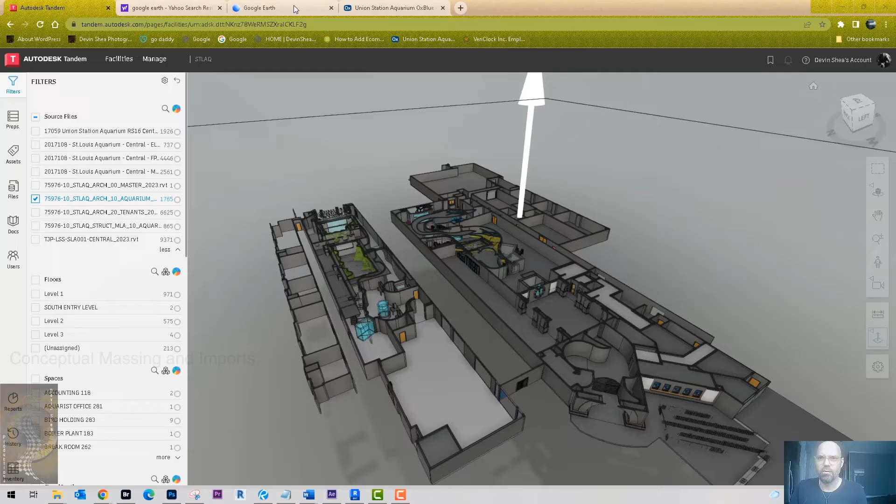This is one of my favorite projects that I was a part of. It's called the St. Louis Aquarium, located in St. Louis, Missouri. I was flown from my home in California to St. Louis to work with a firm called PGAV, a huge firm that does museums, theme parks, aquariums, and stuff like this.

With this gigantic train shed, what we're looking at here is the Union Station Hotel and Union Station in St. Louis. It's a very old train station from the early 20th century that was converted into an indoor shopping mall in the 80s, then bought by a developer around 2012, and we built a $150 million aquarium to go inside of here.

It has a nice Ferris wheel, and you can see the St. Louis Aquarium is now on the sign. I can't remember the exact square footage in here, but it is just massive.

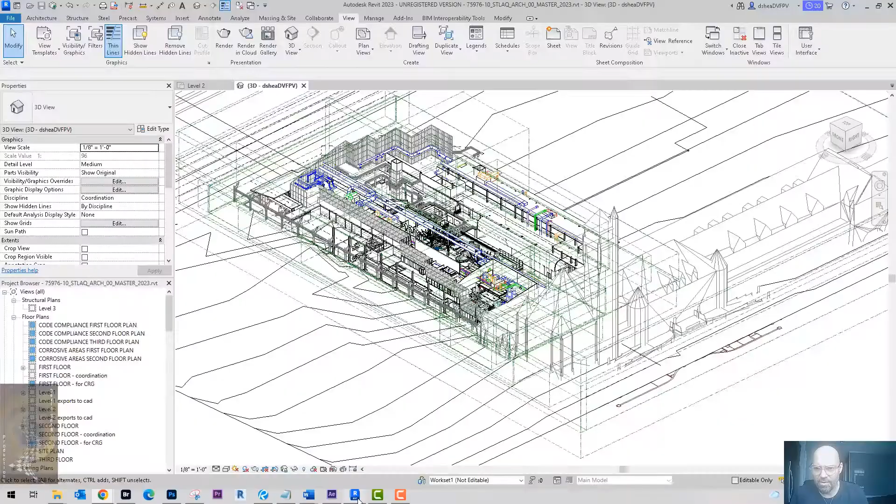What I have is the Revit model, and I'm going to be using a program called Tandem to give a proper walkthrough of the model.

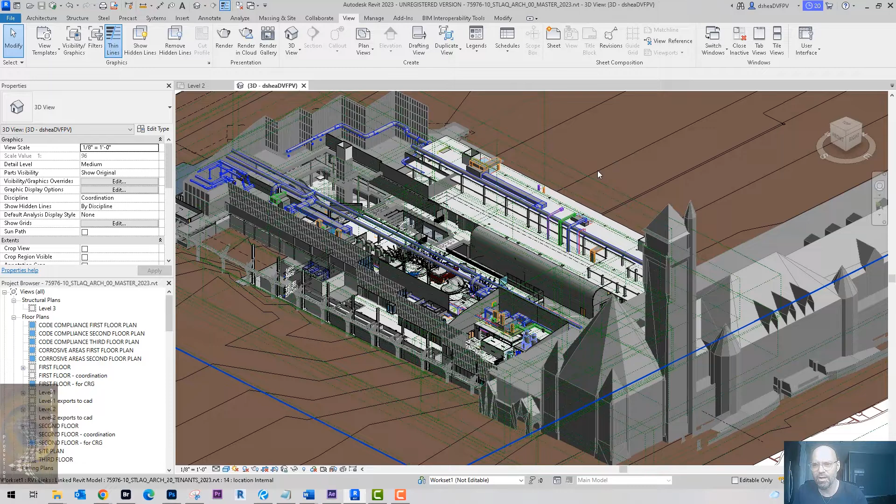My involvement in this project was I was brought in during the DD stage because we needed to create an Unreal video game that we were able to walk around in, in full high quality render mode with VR goggles and whatnot, to show the developer what his $150 million project was going to look like.

This has about 8 different Revit models linked together and properly coordinated. We have an as-built model and all of the standard consultants, and then a huge LSS for fish and wildlife in here.

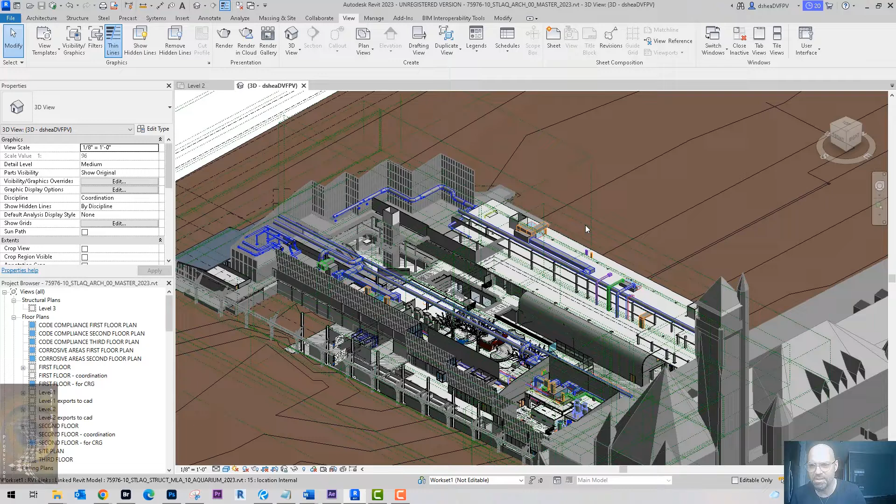My involvement in the project was I was the BIM coordinator, so I essentially did all of the architectural modeling and then coordinated about 30 disciplines of different designers and aquatic specialists and aquarium habitat folks. We used Revit as the primary medium, but we also had AutoCAD and 6 other different types of digital media going in and out of this project.

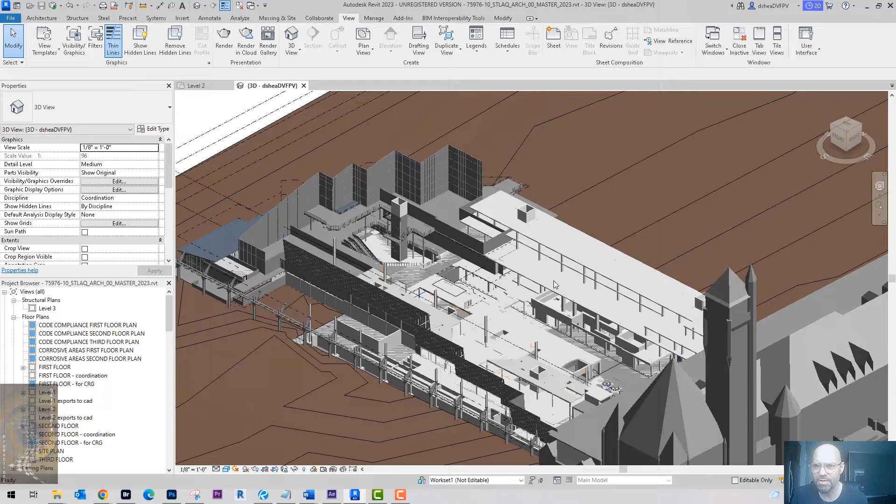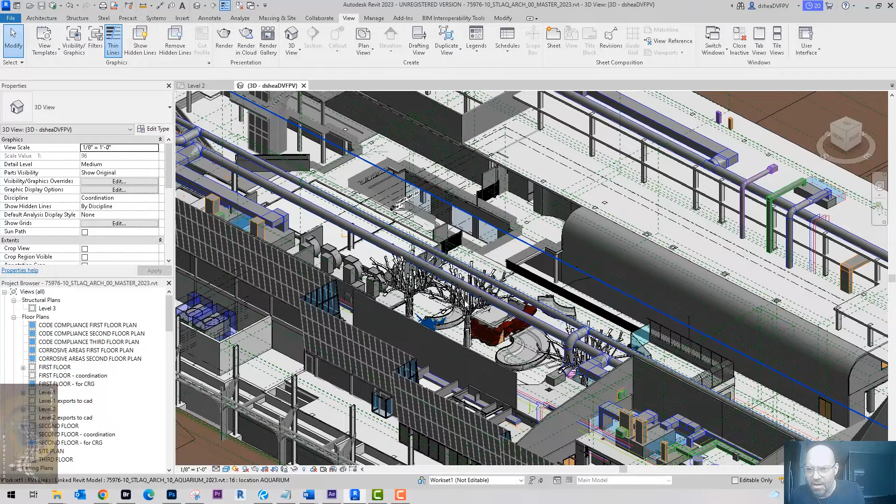I basically was working for the architects PGAV, and I built all of the architectural related items, and then different designers built different elements for the model. For instance, we had graphic designers creating signage, exhibit designers creating different things for the exhibits, and your normal engineers and different types of people working on that kind of stuff.

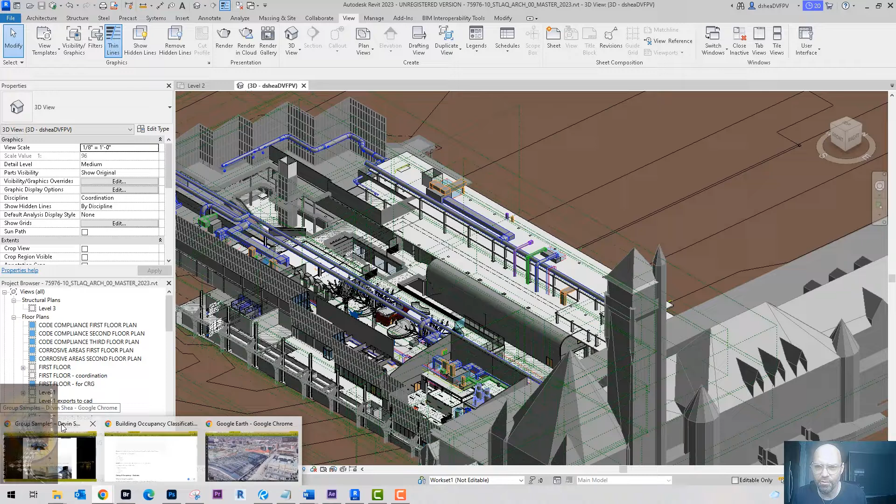Once we would create the architectural model inside of Revit, then we would kick it over to the visualization team, who would build further detail in 3ds Max and implement it into the video game, but all of the work flowed through this Revit model here.

What I have is I'm going to use this program called Autodesk Tandem to go over the different models and give you a little walkthrough of the project.

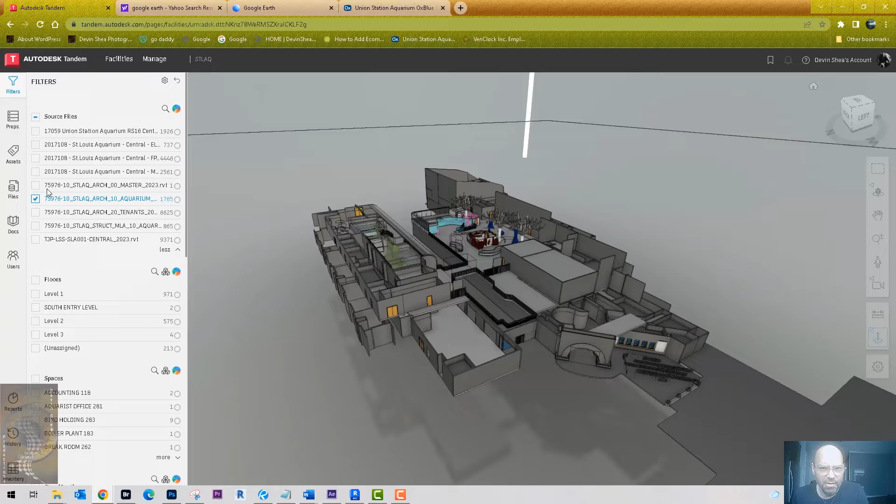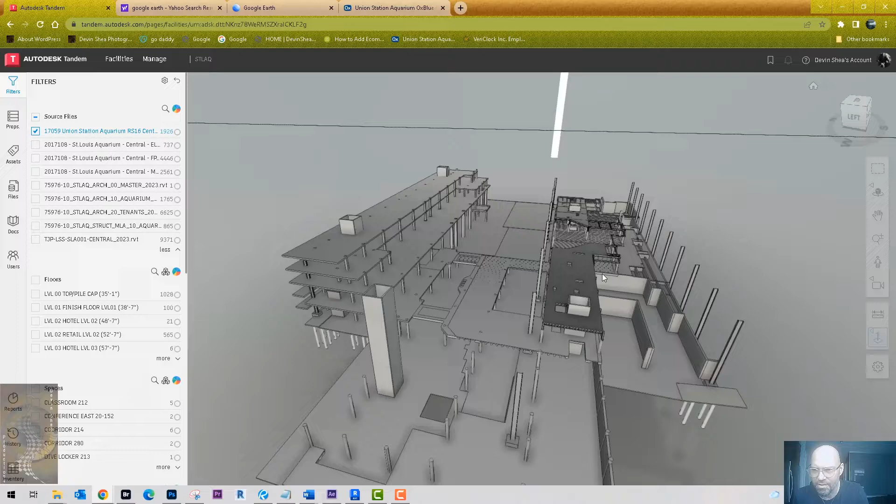So we first have some as-built conditions. Like I previously mentioned, this thing was fitted out in the 80s to create sort of an indoor shopping area. So you had a big open atrium here that you could walk around in, and then you had different stores and restaurants on these different levels. And then there's actually a hotel that has rooms up in this area here.

So, turn on some of this stuff.

Okay, so this is the actual architectural model here, which I was in charge of. I modeled most of this stuff here. We're going to be going over that in a second.

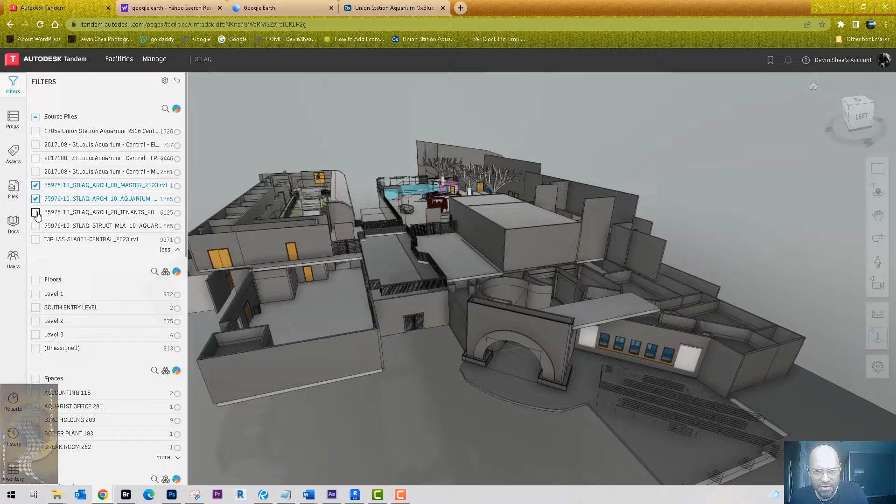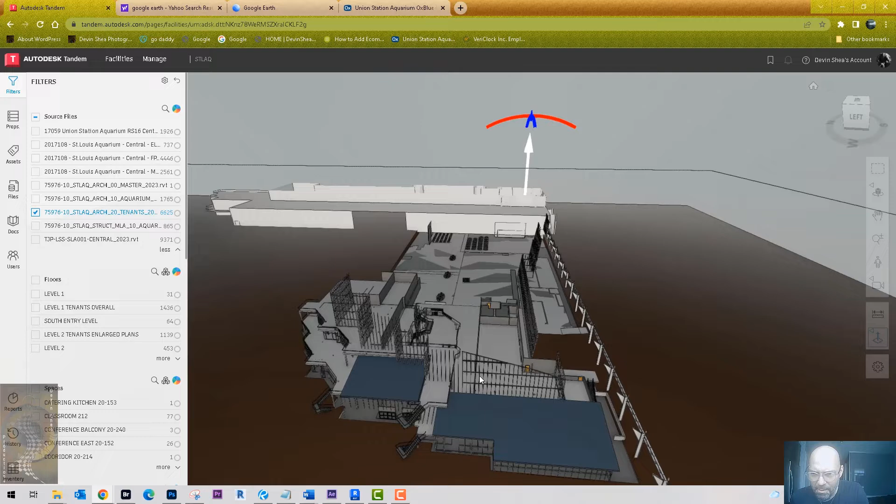Then we also have all of the normal consultants. Turn this off a second. So this is the new structural model here, the new piles and stuff you can see down there.

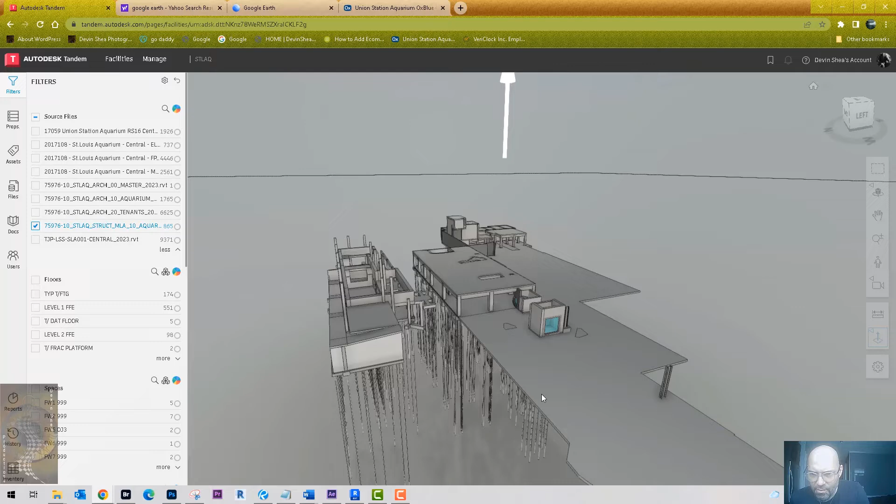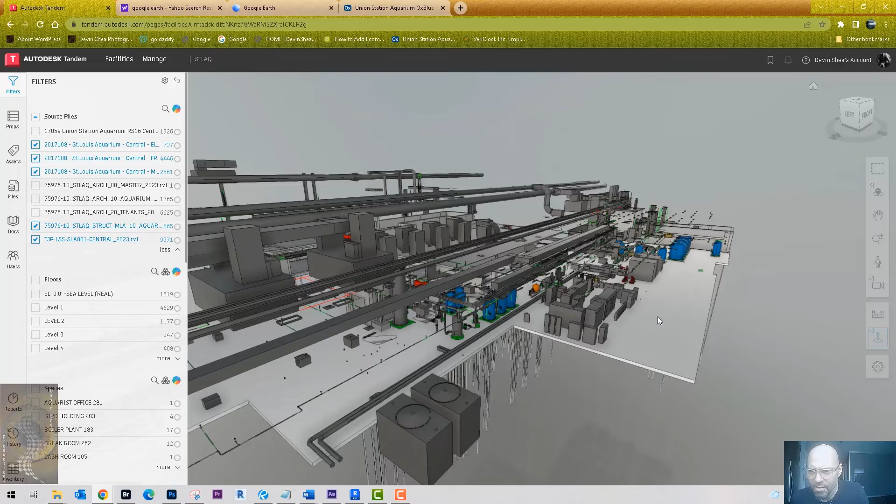And then we have your standard mechanical, fire protection, electrical, and then we also have LSS for fish, as I call it, so life support systems for aquatic habitats—make it sound a little more intelligent. So these are all of the MEP items here in the model.

So I just coordinated all of the consultants' BIM workflows, and I was basically in charge of the model on the Revit side—I'm sorry, in charge of the Revit model on the architectural side.

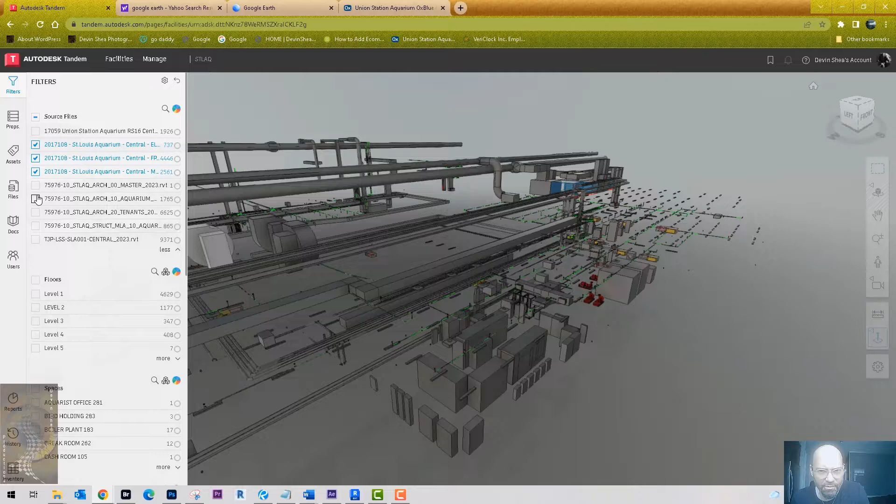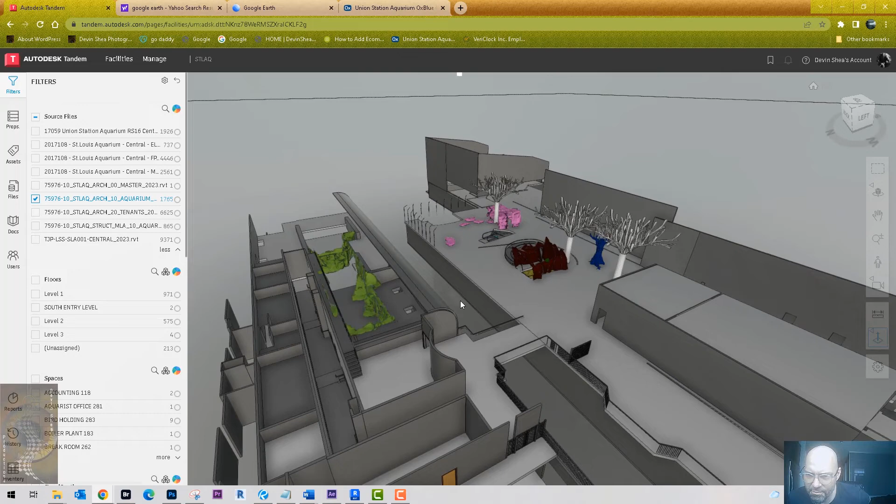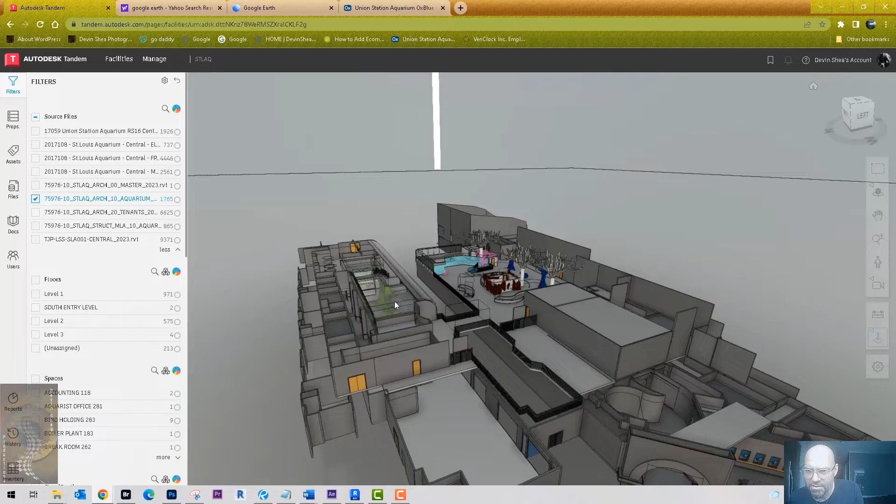Alright, so then what I'm going to do here is turn this on. So all of this is the aquarium itself. Up here on the top floor area we have the touch tanks, the otter exhibits, and this was basically broken down into different parts of aquatic habitats. So you had saltwater fish, freshwater fish, things like your standard bass and trout and whatnot, then there was a shark tank—this is actually the shark tank in here—and different smaller jewel tanks and little exhibits all along here.

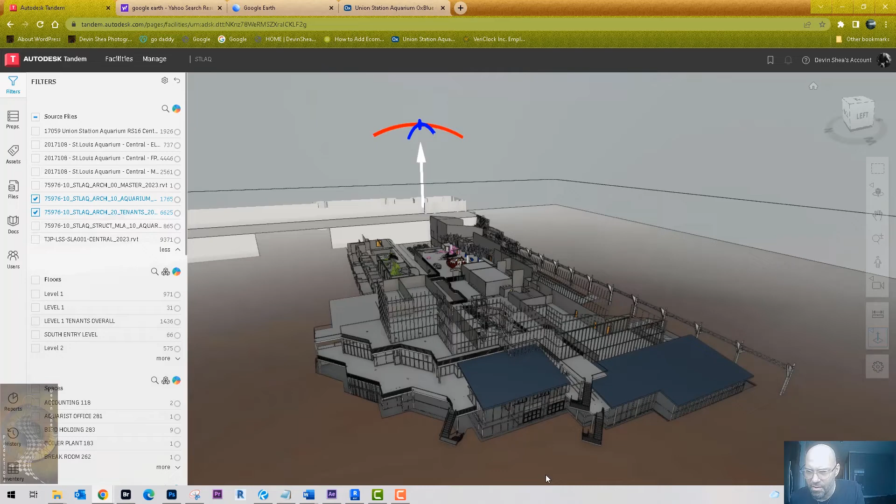So essentially you would come into the front doors, which were located here. You would enter here, go through a little entry area, and then once you're inside of the actual aquarium, you would enter the aquarium here and make your way through the exhibits. So what I'm going to do is go into first person mode here.

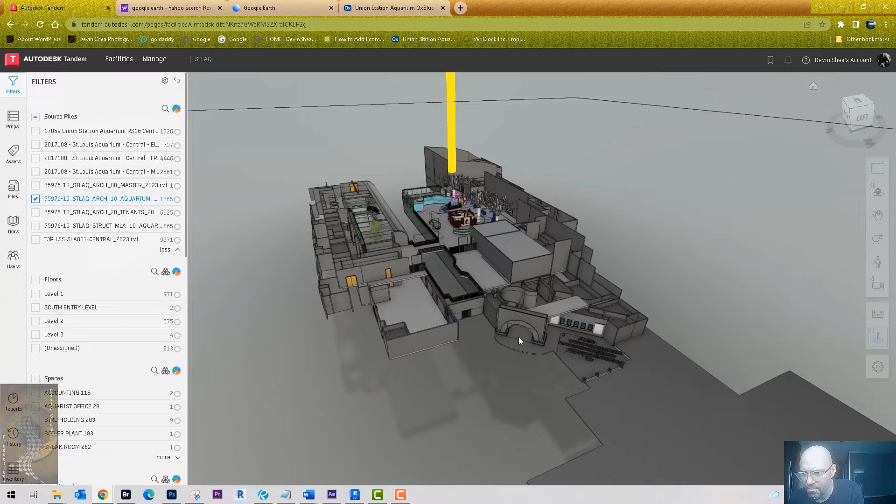Excuse me while I fumble around for a second. Alright, see if I can get this to work. Okay, so now we're going to take a little tour. Hopefully this floor will not give me too much trouble here. Caution, I am not the best at walking through. My nephew would love to do this. And of course this is working fine before I started recording here.

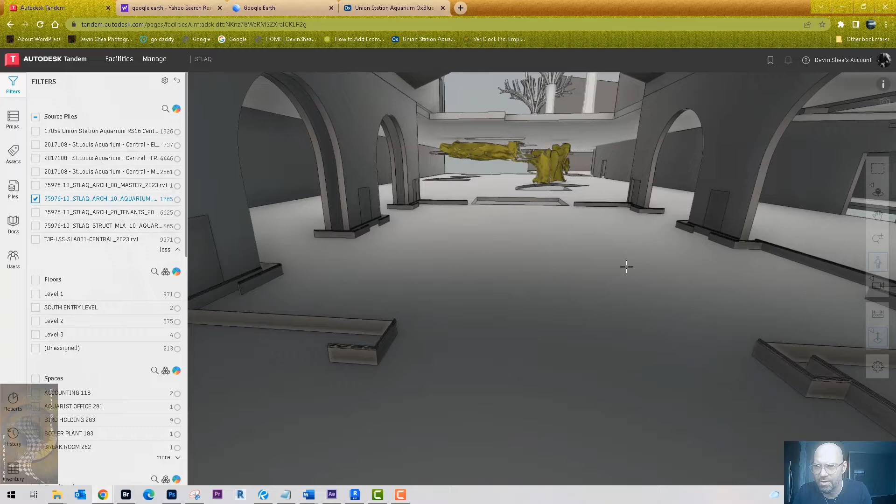So we just entered the aquarium, so you're going to come in here to the first area, which is the main train hall. The aquarium sort of had this train theme because it was an old train shed. Let's see if I can rotate here—can't really orbit. So from here you would walk into this little area, which was a little train car, and then you could walk down here.

Unfortunately the model is glitching out a bit, but as you come around this corner here, you are entering the Muddy Missouri, I believe it was called. So this is all rock work with the fish tank here.

So inside of what you're looking at here, this was rock work that was modeled using ZBrush. There was an exhibit artist that would create a 3D mesh of what would become prefabricated pieces of essentially plastic rock or plaster that made it look like rock, and then they would take this model and export it to me, and then I would stick it into the Revit model.

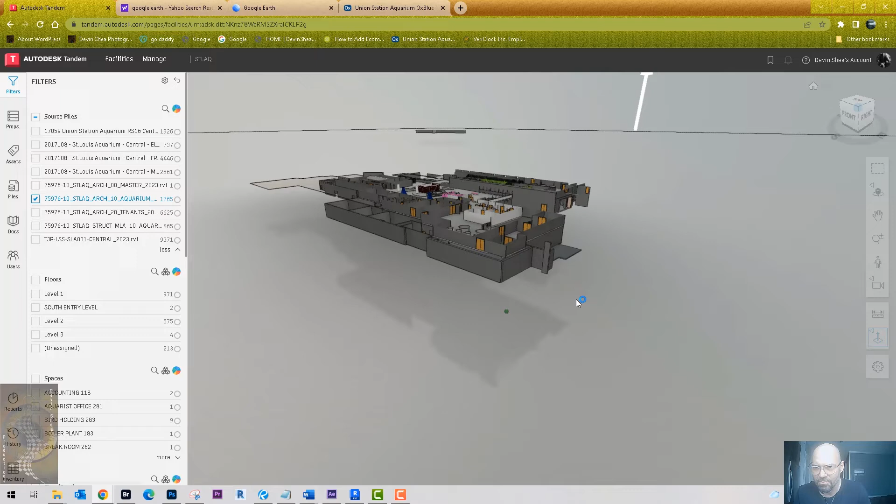So I'm going to get out of first person mode here. And then I'm going to use my cut plane here so we can have a better look. I want to zoom in on the shark tank. I always have to turn on my tenant model. Let's see where I'm at.

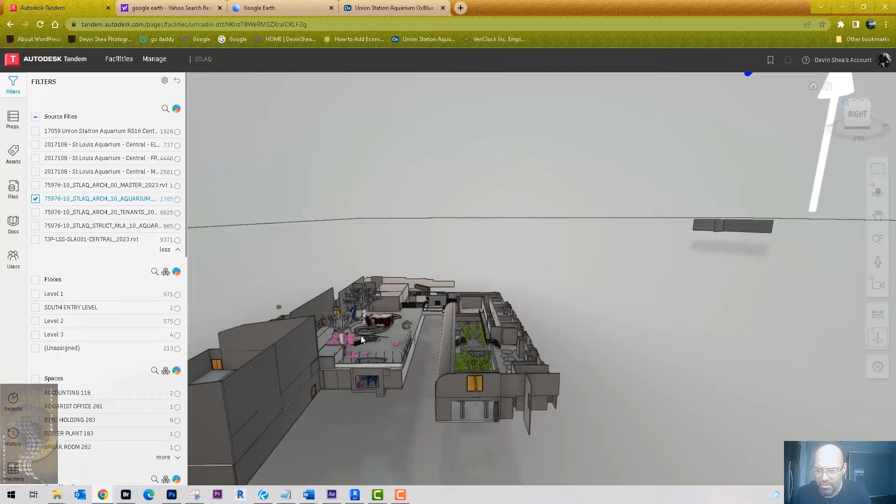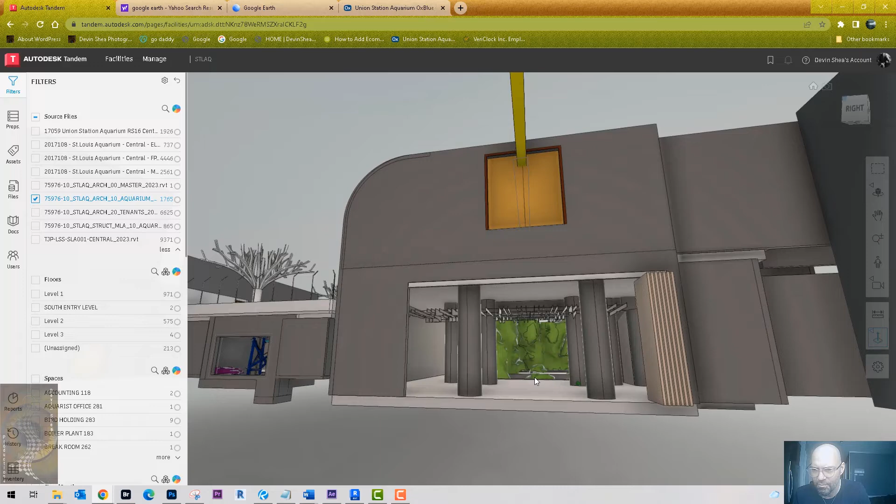Okay, so the shark tank is located here. Is the shark tank here, and you would walk in essentially from the hotel lobby. So this area right here would actually be the hotel lobby, and then you would walk in. There's actually a picture of the shark tank on my website. There's my lovely ceiling thing that I made. So this would be the shark tank area here.

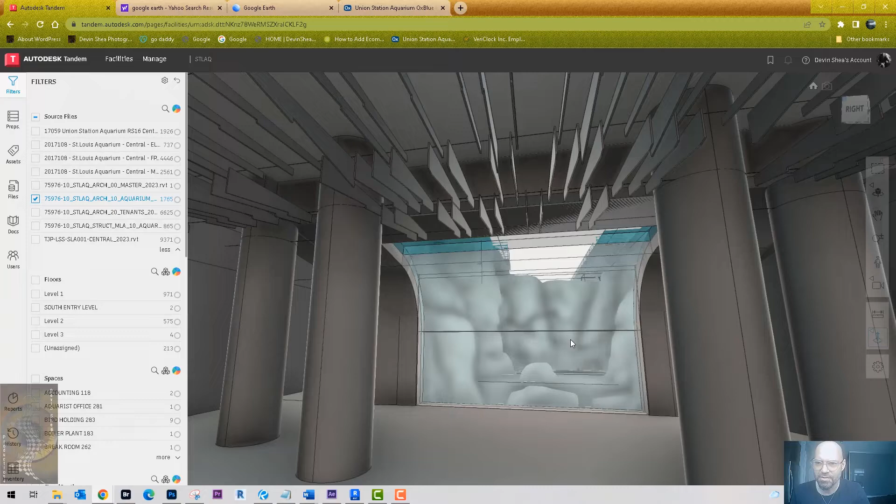It's the biggest tank and the coolest in the whole project. So let's zoom up here a little bit. This is a little crane that they use to bring stuff into the tank and take the sharks out.

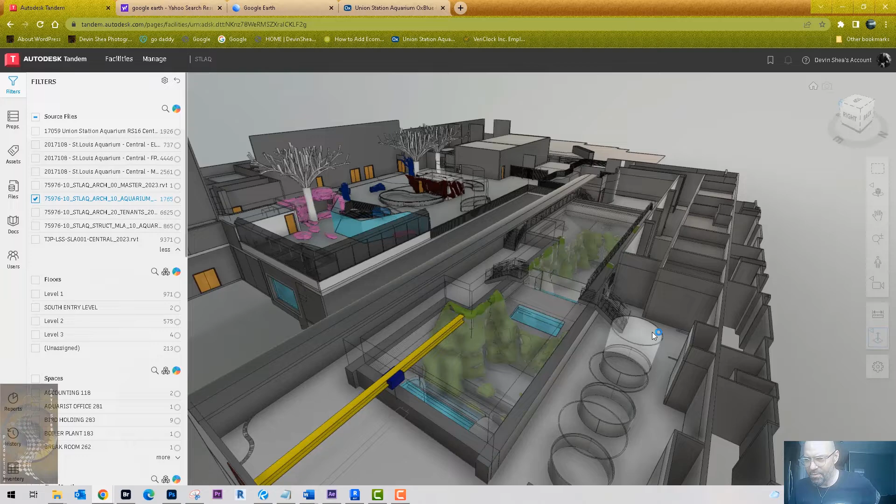These are little service areas. I'm sorry, these aren't service areas, you can actually walk above the tank. It's only been like 6 years since I worked on this, so I'm trying to remember, but these are little jewel tanks here that have different types of fish in them.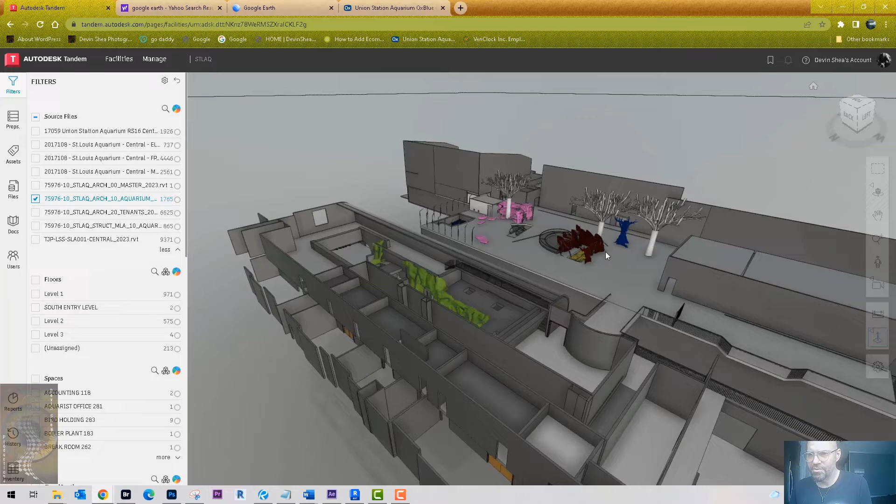And then you can walk over here above the shark tank, find your way over to here, and across this little platform over here to the touch tanks and the otter exhibits.

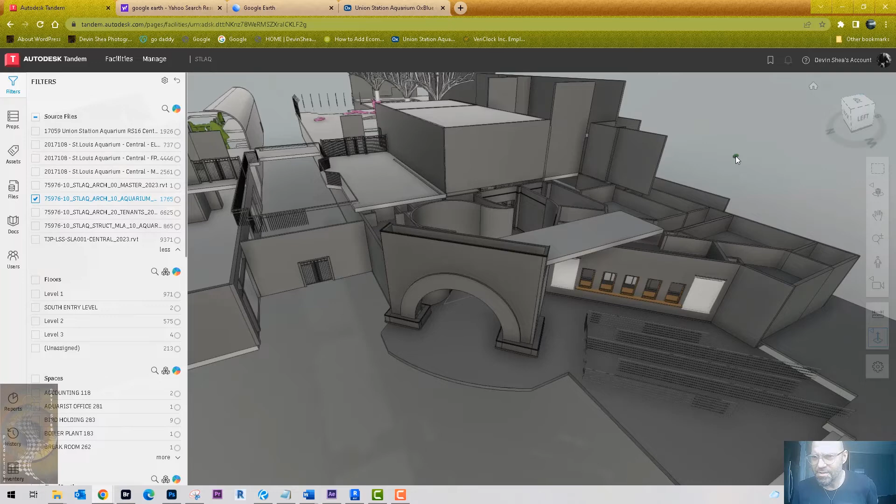So the challenges of this project were that there were many different trades and consultants using all different formats of digital delivery. So we had people using AutoCAD, people using IFC models, all kinds of stuff. The difficult part for the architects and myself was that they didn't utilize a 3D scanner.

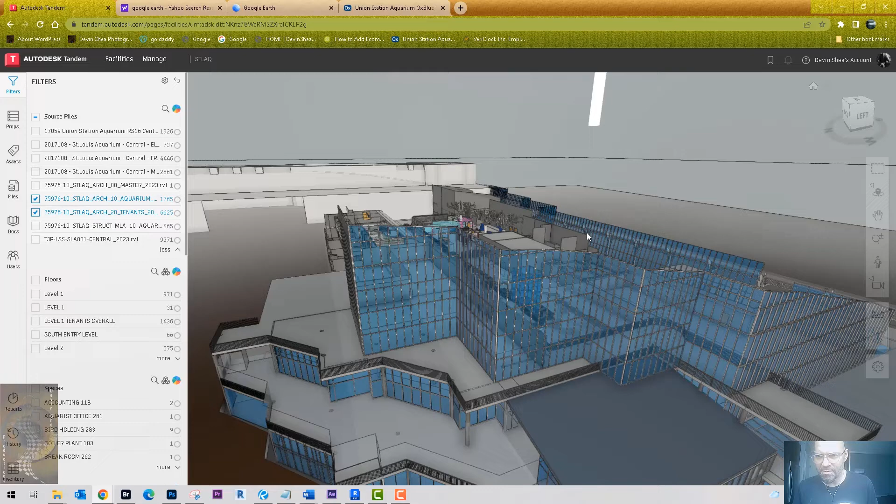So things like this curtain wall, where I literally had to climb on top of this roof right here and use a tape measure to attempt to measure these walls. A 3D scanner would have been great, because this train shed roof was like 200 feet tall, so it was very, very tricky. Maybe not 200 feet, but pretty darn tall. So you can just imagine what the scope of this thing was inside of here.

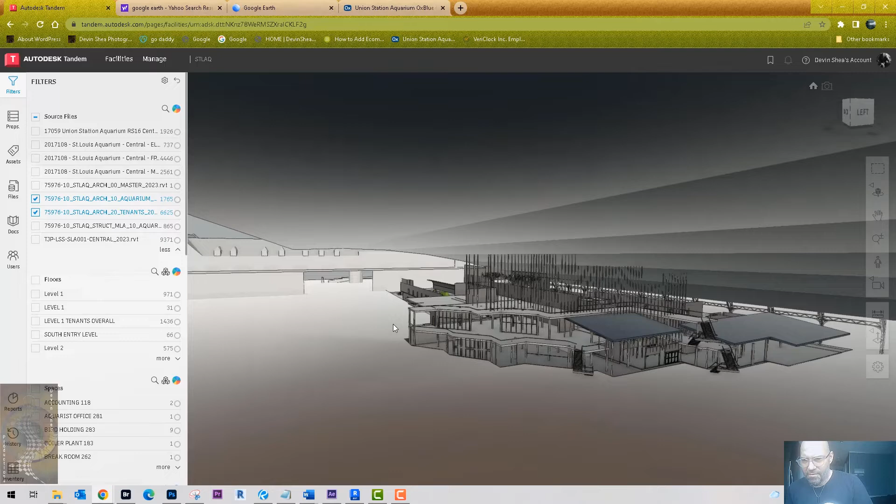Okay, well that is all that I have to talk about on the St. Louis Aquarium. This is one of my favorite projects because I am an expert in visualization. I'm trained on all the video game stuff. So basically what I did was consult with my team and teach them all of the ins and outs of the workflow to deliver this project.

After the project was done, they've won several awards on this project, and I recommended my clients for a technology conference in St. Louis. So I actually submitted to a colleague of mine that they should reach out to PGAV and have them come and speak at the convention. So my project architect and the project manager on this project, including the visualization gentleman Steve, were all keynote speakers at a technology conference, since I kind of helped them do all this.

So this was a pretty big deal in St. Louis, because in the Midwest, BIM is not really utilized a lot. So thanks for watching my presentation. If you have any questions, feel free to reach out to me.